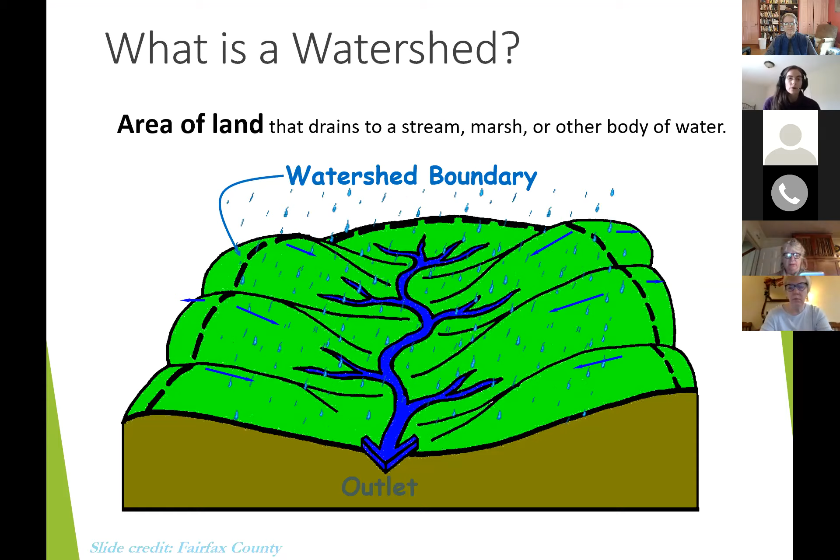We have some slides - again, the definition: an area of land that drains to a stream, marsh, or other body of water. So everyone's got a watershed address.

For example, here where we are, Accotink Creek eventually does drain to the Potomac River. So you can say you're in the Accotink Creek watershed, but you can also say you're within the Potomac River watershed. Then eventually we get to Chesapeake Bay and then the ocean. So these watersheds are sort of nested inside each other - you can say you're as small as a local stream, or even up to within the Atlantic Ocean watershed.

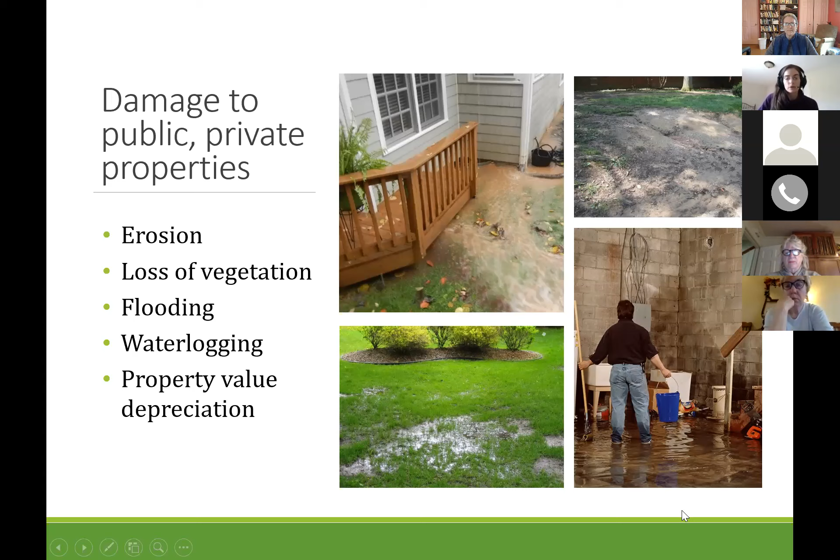Things like ponding water in the yard, but all the way up until actual damage to the home and the foundation and basement flooding. So as I talked about at the start, there are some conventional solutions.

These are more the capture-it-in-a-pipe-and-move-it-away-quickly solutions. Not saying these are wrong—these are the typically used solutions—but now we're trying to think a little bit more about adding in infiltration. Instead of just taking the water off our property and pushing it to somebody else to deal with, let's try to be responsible stewards and capture our stormwater as best we can, reuse it, or let it soak into our properties.

Common solutions you might see around homes or communities that are conventional solutions are just downspout extensions—burying, connecting it to a corrugated pipe, burying it, moving that water away from the foundation, which is always a great idea. You don't really want that water discharging within about 10 feet, especially if you have an underground foundation. It can be closer if you don't have any subgrade structures like basements. Generally, the rule of thumb is about 10 feet from the basement is a safe place to discharge stormwater.

French drains are another commonly used solution. I've heard French drain used as a term, sort of a catch-all when stormwater contractors are talking about them. Sometimes the downspout extension, which is just taking a solid pipe and moving the water away, is also talked about as a French drain. It can be hard—you can ask clarifying questions to really try to understand what your contractor is talking about when they say a French drain. There are many different solutions that go into it, so try to understand the actual solution being proposed.

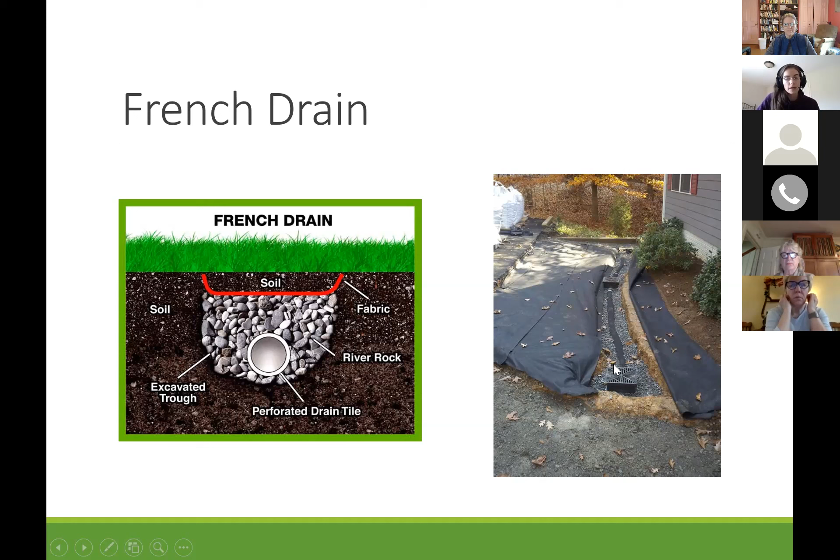But the French drains move the water. They're trying to drain the surrounding soils, soak it into the pipe, and move it away again for any low-lying wet spots. These solutions are typically used that way.

Catch basins I just referred to can be part of that French drain system, or they can be installed at those low-lying wet spots on their own. Frequently the catch basins, instead of being connected to a perforated pipe with holes trying to drain the surrounding area, can just be attached to a solid pipe that diverts that water away someplace else.

Another conventional solution commonly used is a dry creek bed. Again, we've got a downspout here. Sometimes these solutions are great ways to try and move water off of hill slopes. So a lot of what we're going to do is try to see if there are ways we can divert runoff off of hill slopes, because they can be very erosive on hill slopes.

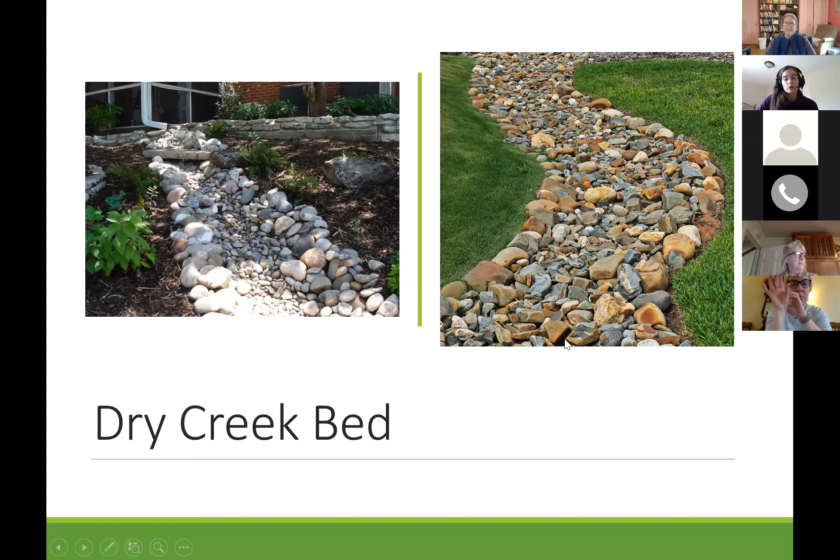So this was probably cutting into the soil. By hardening this channel, you can safely divert it to another place. Maybe there's an opportunity at the bottom of this hill to then infiltrate that water, which is the next step we'd like to see. But as a conventional solution, dry creek beds are just a more visual way to do it—instead you could have buried a pipe through here connected to this downspout. They can also be larger, capturing water moving across a landscape.

Some examples of conventional solutions: this is the installation of some retaining wall and also a French drain system going in.

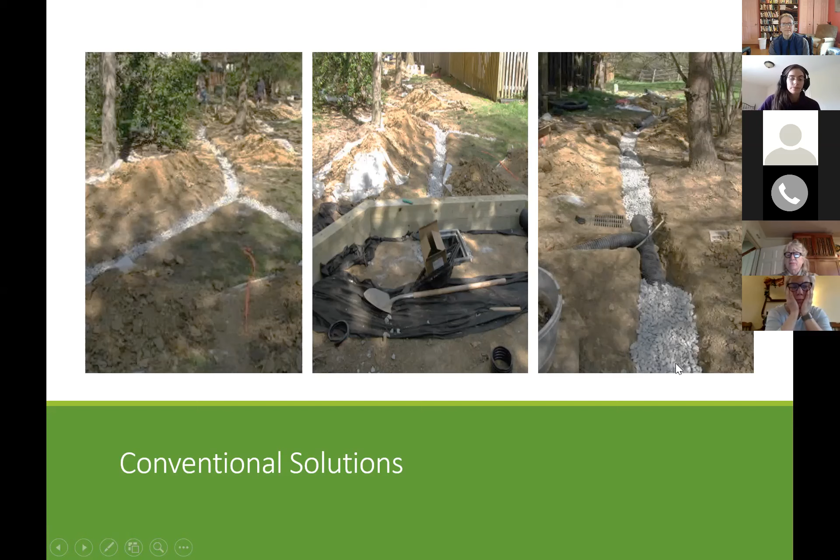So conventional solutions, what do they do? We just talked about them—they capture and they concentrate that flow. Sometimes they cannot be effective in dealing with a whole bunch of water, and you might have a lot of maintenance. I'll say for all of our stormwater solutions, you will have ongoing maintenance you need to keep an eye on, but some of these conventional solutions like French drains might be more maintenance intensive.

French drain systems generally, when I've heard people have installed them, sometimes fail in as little as two years; some people say they last as long as ten years. That's because of those perforated pipes, with gravel around them to try to prevent soil from silting in. But because of all the small slits in the holes, they do tend to clog over time, so digging out and replacing that system becomes necessary since it has a lifespan associated with it.

Outfall limitations—so you're putting this water into a pipe. Well, where are you sending it? Where are you directing it? Where is that water eventually going to go? You need to think about that. Quality and quantity benefits we'll talk about when we discuss the different types of green or low impact design solutions.

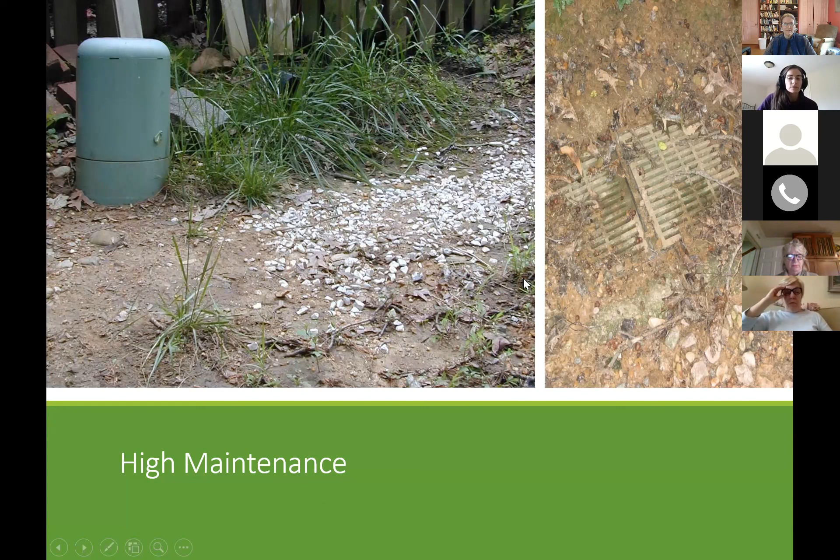Some slides just show some of those issues I saw. Frequently those catch basin boxes can get clogged with sediments if the surrounding area isn't stabilized, if there isn't good turf cover, or if they're used in shady areas or areas with lots of mulch. All of that can still wash into those boxes, clogging up the boxes themselves and even the drains.

So the conventional solutions we just discussed versus these best management practices—I call them low impact design or the more green type of solutions. Our stormwater best management practices we'll talk about; you might have heard of rain gardens as a term—that's one type of solution. They really offer an opportunity to capture that stormwater, reducing the overall volume of stormwater going to somebody else. With the conventional approach, we put it into a pipe, and that pipe is going somewhere, impacting somebody else in some way.

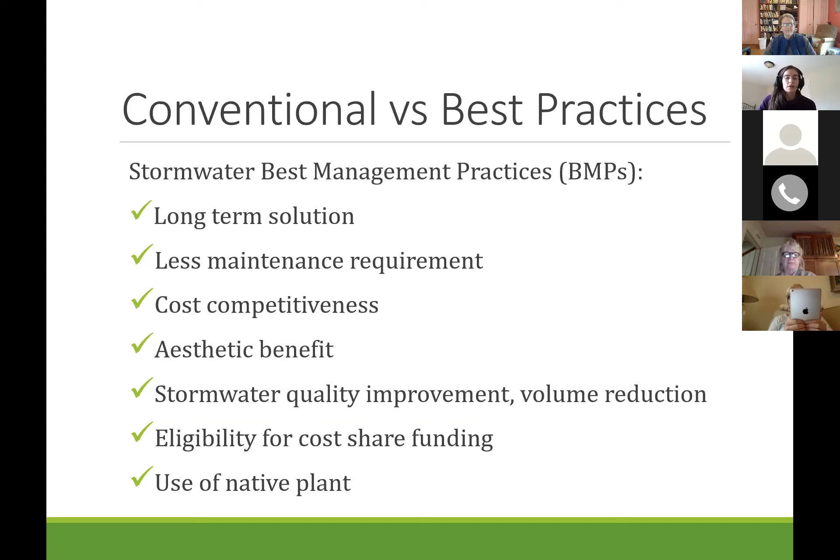Best management practices try to take our stormwater, use it on site, and give it a chance to infiltrate into the ground. One type homeowners hear a lot about is rain gardens. There's other things such as rain barrels, cisterns, permeable pavers, conservation landscaping using native plants, vegetated swales, and infiltration trenches or dry wells.

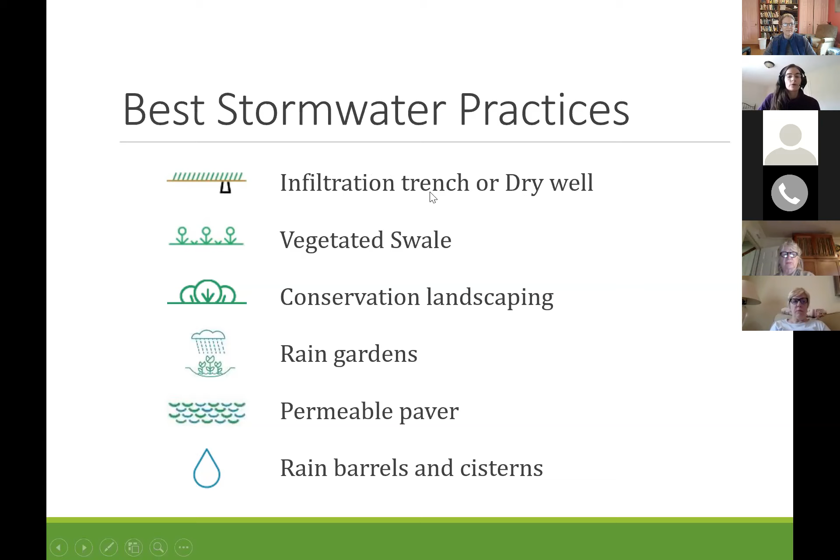Those are two words that sort of mean the same thing. Generally, homeowners, we talk about dry wells as a smaller scale system for a single home on a lot. An infiltration trench is a scaled up version of that practice, just a larger size facility meant to take more stormwater, more downspouts, more runoff.

So we're going to breeze through a couple of these to try and describe some of them. Some of them I've left off, but you can check out the other webinars. In the interest of time, we'll move through these, describe them, talk about when you might use them in a landscape and how they serve you.

There are some do-it-yourself kits you might see at your local hardware store that look like a trash can system. It's empty in the middle, so that gives more void space, so you can take more stormwater if you have a hole that's empty as opposed to a gravel system.

There are many different systems, but these are basically just big holes in the ground that we dig to a certain depth where we can get better draining soils. For the most part, our soil scientists in our area know that when you go out in your yard to try and plant a plant, you've got that Virginia clay everybody talks about. These systems try to get a little deeper than just shallow on the surface, about 2 to 3 feet down.

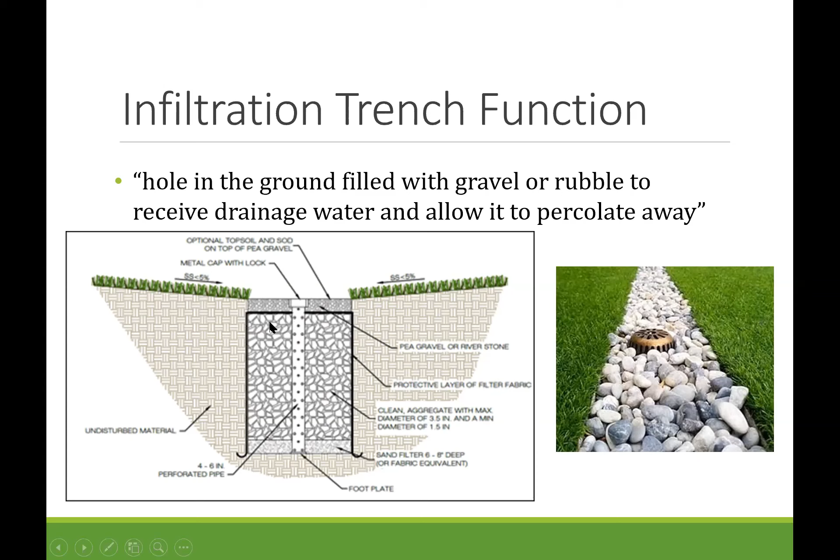So infiltration trenches are doing that same thing, holes in the ground with the gravel just to hold structure. A lot of times there are downspouts tied underground straight into these systems. These can be designed so you might not even see them or know they're there. Some of them can be turfed over.

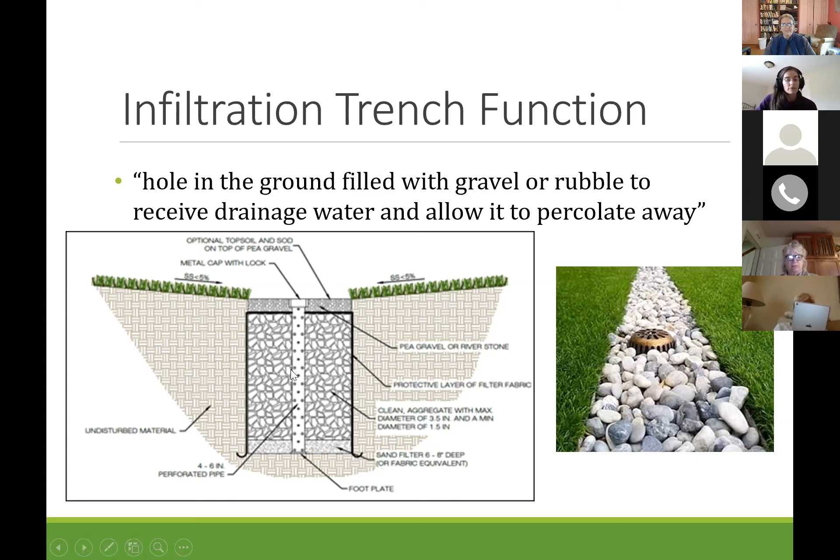This is an observation well. It's good to have some way to keep an eye on them, so you can monitor over time how well they're draining down after a storm. You can check the water level in there.

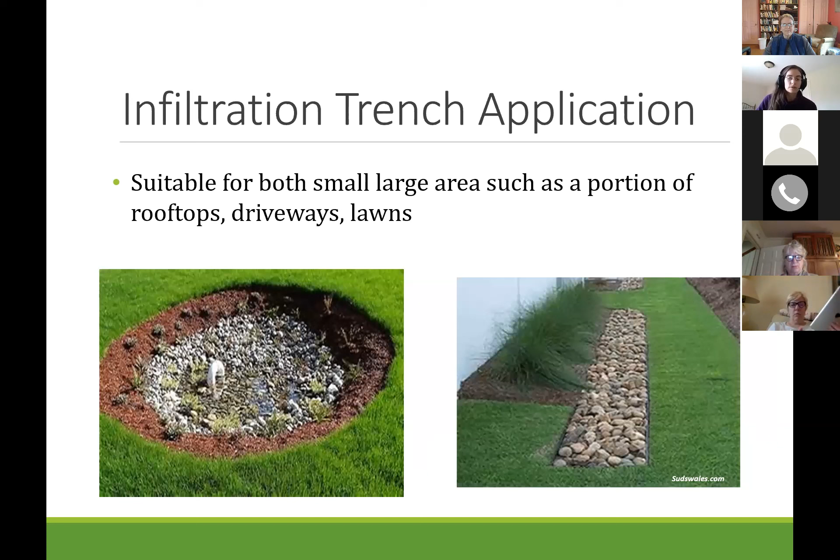So infiltration trenches, like I said, dry wells are sort of a smaller term for the same thing. They can take small amounts of runoff from hard surfaces, like your rooftop, your driveways, and your lawns. Some of these can also be sized up to really take a large volume. Of course, the costs increase as you get larger with these things, but here's an example of just how large they really can be.

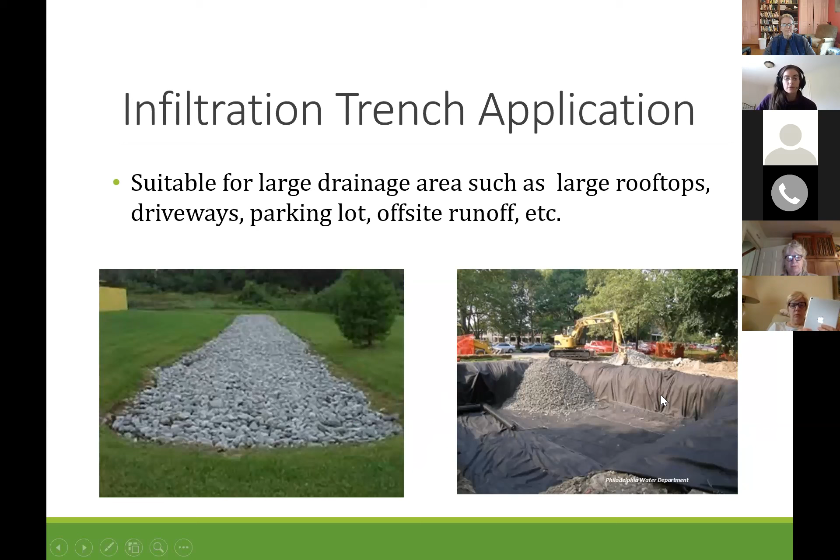Really very large, taking area from very large commercial settings, maybe parking lot runoff and other things like that. This is an example of an installation of an infiltration trench that went in. So sort of the end product here, you can see digging down to create that. Some downspouts were routed in here. That's the observation well I talked about, to keep an eye on how things are going and draining down. But this was just turfed over.

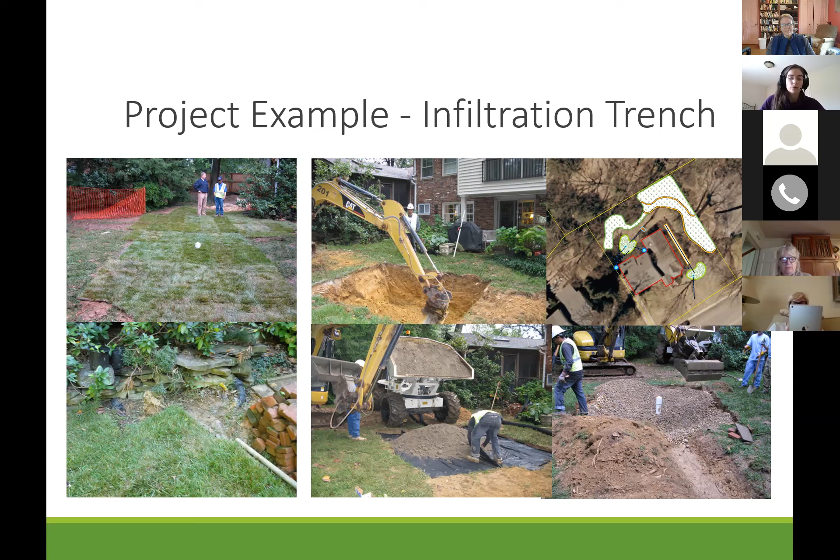So you might not even know it's there in the landscape, doing a lot of good for you. Some of these stormwater solutions can really be blended into the landscape well, while others can be more visual features, like rain gardens. This infiltration trench example used some catch basins to try and drain some low areas, and it also had the roof downspouts routed into it.

What are the benefits from installing an infiltration trench? They work for both small and large drainage areas, so that's how much runoff they can handle. Some of them can handle large parking lot areas, so they can really handle a lot of water.

So we get quality benefits and runoff reduction benefits from these solutions.

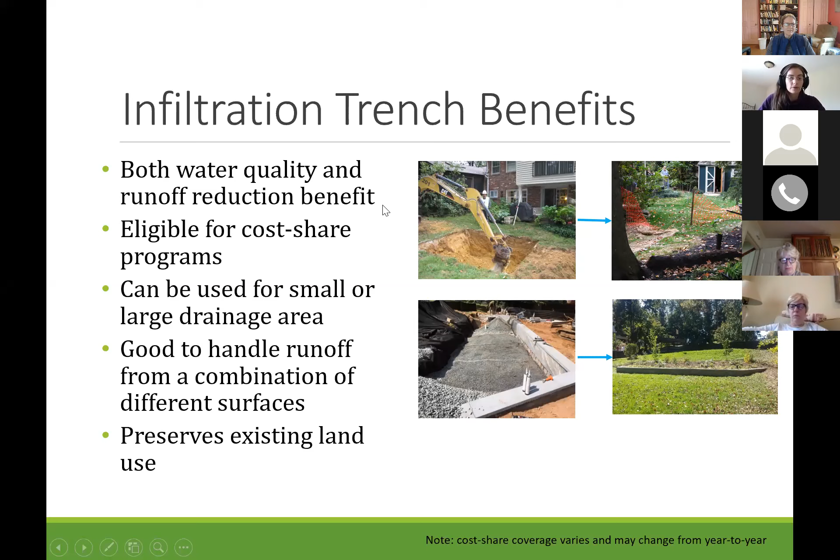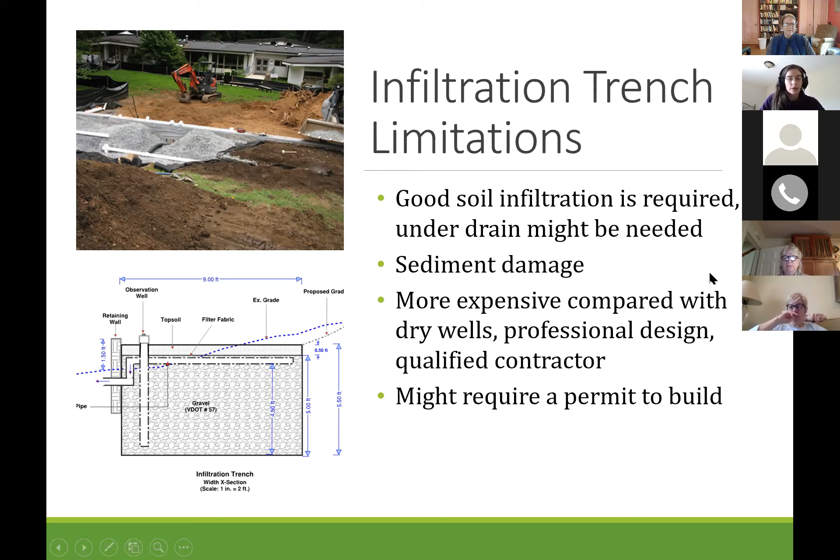Limitations: as with any of these stormwater practices, you really need to have suitable soils for infiltration. Most of us are familiar with digging and finding heavy clays in the top layer, but these systems dig down deep. This one went down 5 feet, so pretty deep systems where we're going to get freer draining soils.

At local hardware stores, you might have these dry well, pre-made solutions. These are those chambers I was talking about. They're completely empty, so you can actually hold more stormwater than if you just had a whole gravel-filled area.

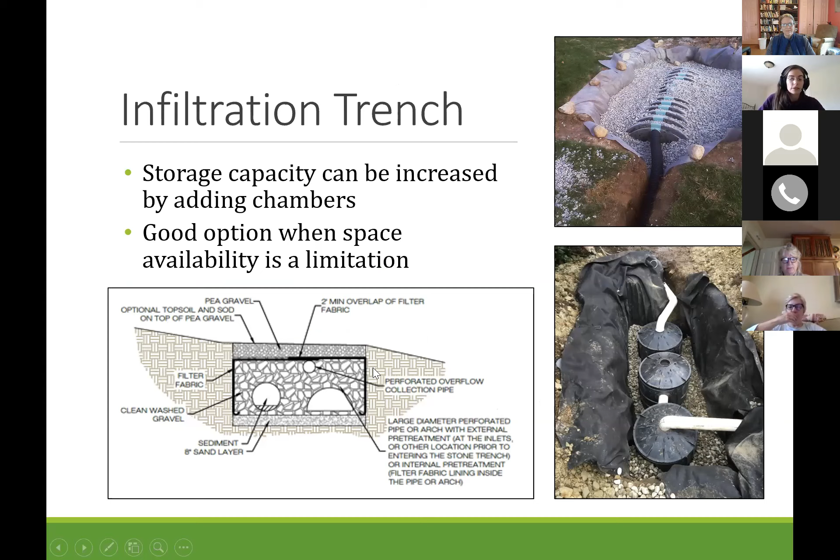Next we're going to discuss vegetated swales. One of the homeowner associations that I received pictures from actually was referring to issues with swales, and we'll get to those photos later.

Generally, swales are channels built to convey runoff. You want them to be well stabilized, so you do want vegetation there, or if it's too steep you might have to use rock material, because vegetation might not be able to handle the steep slope and slow that water down adequately.

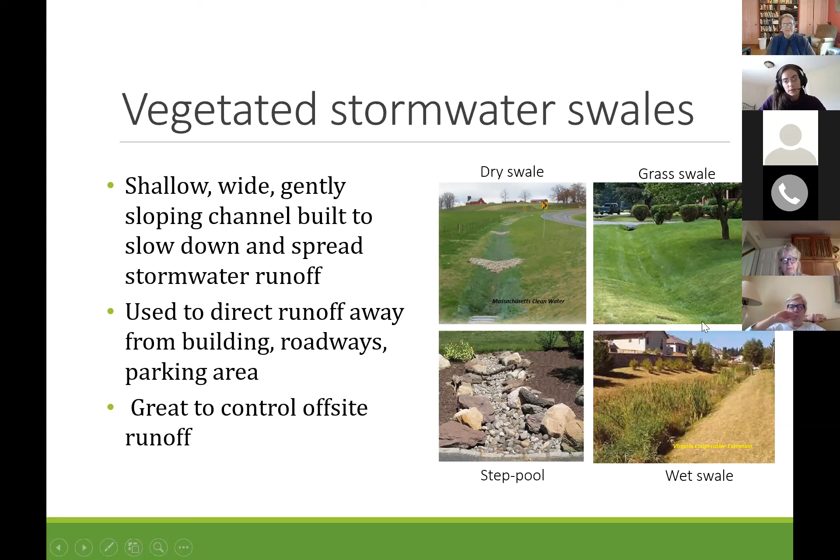This is a bigger example of those previous slides.

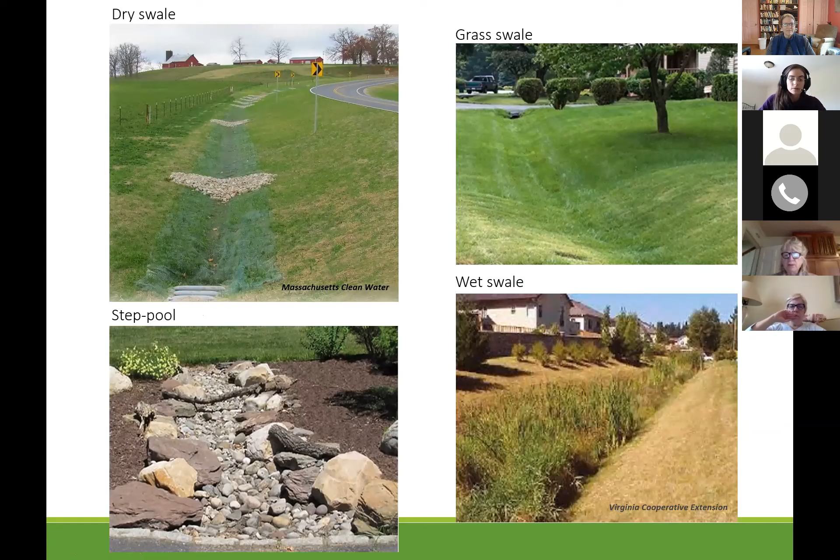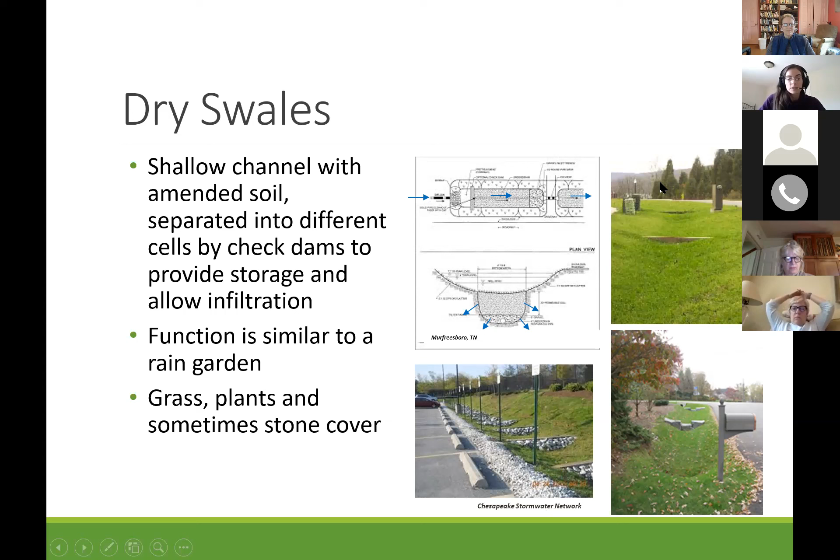Dry swales again use those little check dams or rock structures to slow the water down and give it a chance to filter in. These dry swales, even though they look like they're just turfed, actually have amended soil underneath. We need well-draining soils underneath for these to work, but we can add well-draining soil and these little check dams to allow water to soak into the ground rather than just speeding on through.

Here are some pictures of really gorgeous vegetated swales. Overall we're trying to decrease the amount of runoff, so doing some volume reduction, some capture and infiltration.

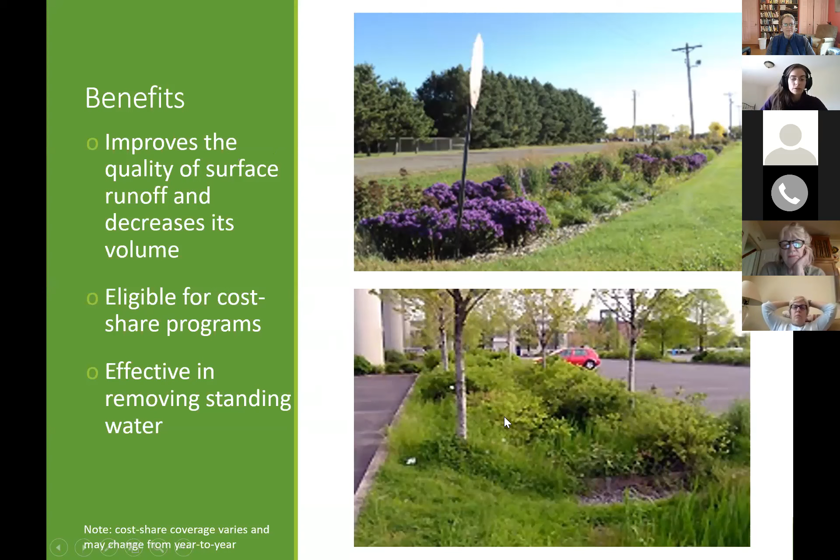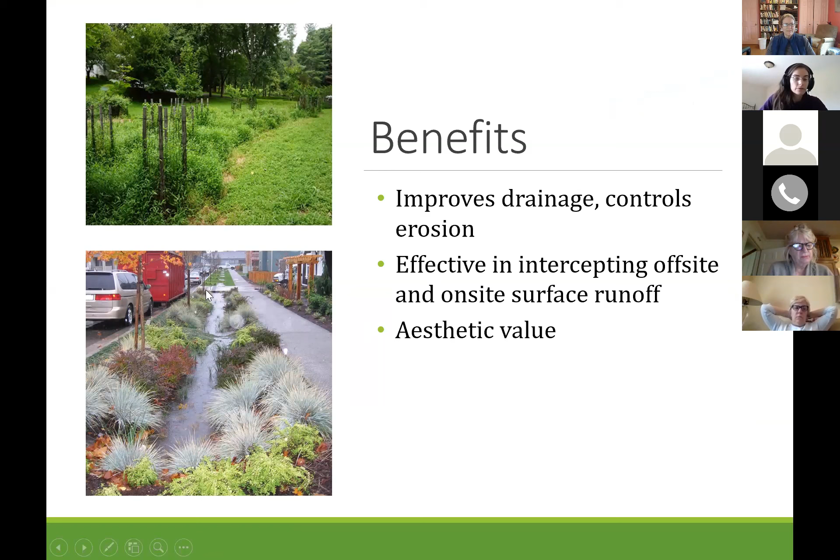Limitations to these practices: you really can't just plug them in anywhere. Infiltration trenches need a relatively flat area and well-draining soils for you to stick a dry well or infiltration trench. Swales really need to be pretty large solutions with gradual slopes to have the capability to slow down and spread their water out - not recommended on a steep slope.

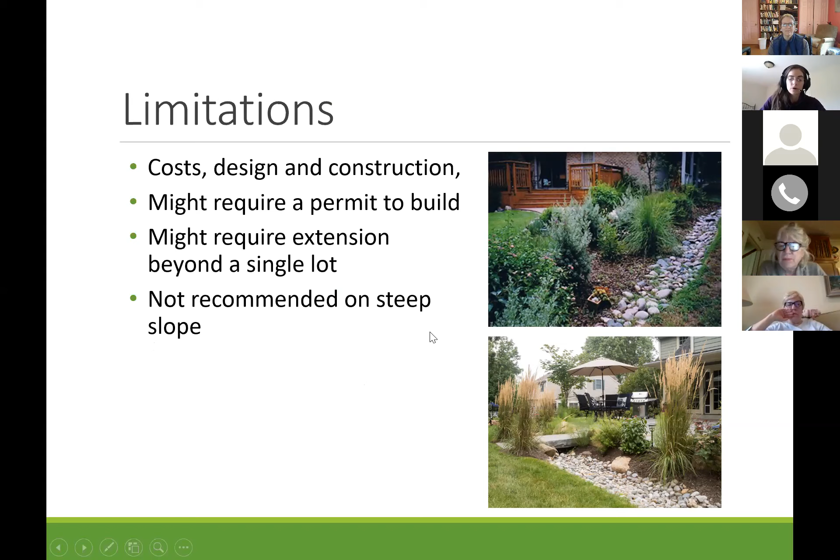What happens when you have a really steep slope and need to use rock material? Before we showed that dry creek bed solution as a conventional solution - this step pool is a very different solution. We talked about amended soils under that dry swale; the same thing applies here with the step pool. We're really getting in and replacing some of this material.

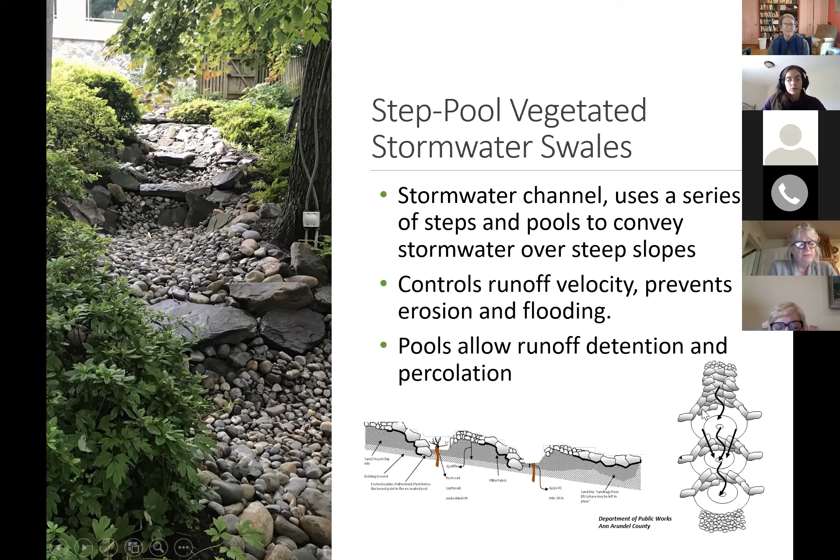We're trying to have these steps, these check dams with ponding areas, so as water flows through it's not shooting quickly down - it actually has a chance to stop and soak into the ground as it moves through. With a steep slope, you really might need a rock-reinforced channel if it's a shorter, steeper area, because vegetation just won't hold up to the velocity or flow moving through there.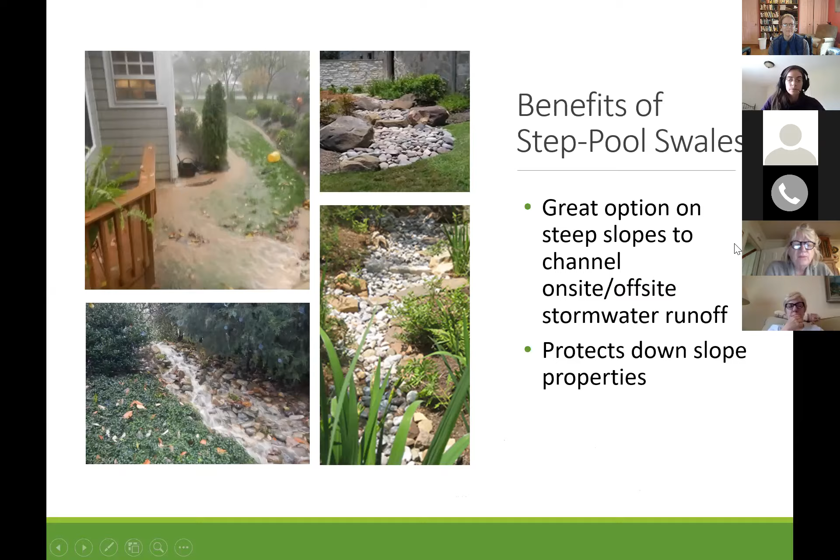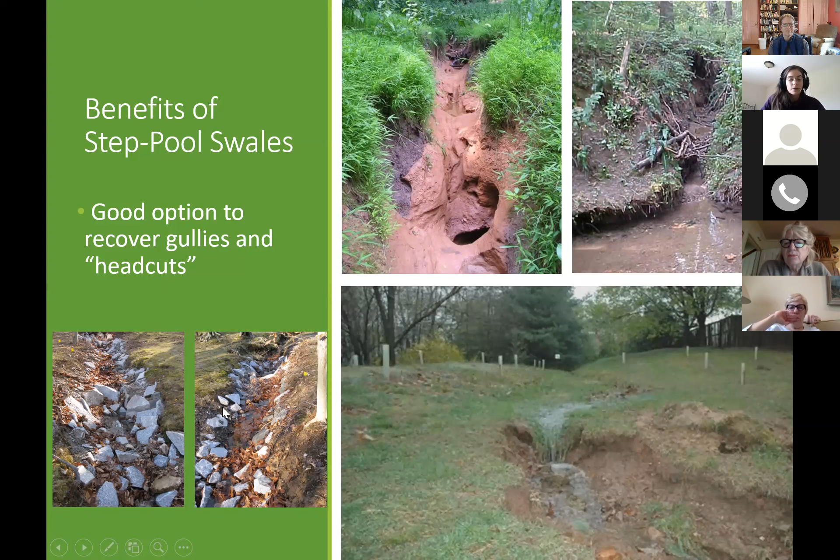Much of this is the same as what we talked about with the dry swale. Step pools can really be used to recover from pretty drastic situations, like gullies or headcuts that might be occurring in the landscape - these systems might be able to be installed there.

Limitations - these can be pretty expensive design solutions, with lots of earth moving and rock material and grading involved.

Downslope connection - just think about how water is still moving through this. We're trying to capture some, but eventually it's going to discharge and end somewhere, so think about where you're sending this water. If you get a large storm, you'll have a lot more moving through than your system can handle, so where is that going? Make sure it's properly stabilized to handle the amount of flow moving through it.

Conservation landscaping - one thing we talked about is using local native plants, replacing turf grass or other invasive areas in the landscape, maybe even areas of bare soil, and trying to incorporate native plants.

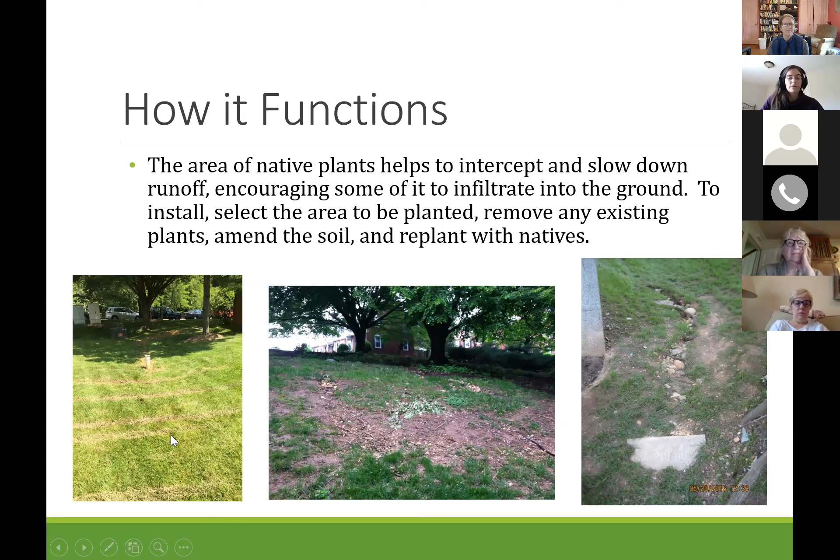Conservation landscaping - again, using native plants, we're trying to improve the infiltration of the ground with deeper rooted vegetation than turf. Hopefully if there's stormwater moving through, more of what falls is going to soak into the ground rather than running off the turf. A lot of water on turf, especially with slope, is going to be conveyed across the landscape rather than soaking in. We're hoping the native plants give an opportunity for that water to soak in.

For homeowners, it's a pretty easy do-it-yourself project - conservation landscaping, removing invasives or turf grass, and just adding in some native plants.

In heavy shade areas, grasses or conventional lawn grasses don't do well. If we only have about 3 to 4 hours of sunshine in a spot, our grasses really aren't going to hold up and do well.

Plant Nova Natives has lots of templates and different designs and plant lists, so you can use some of those solutions, design it yourself, or have a landscape designer help install those.

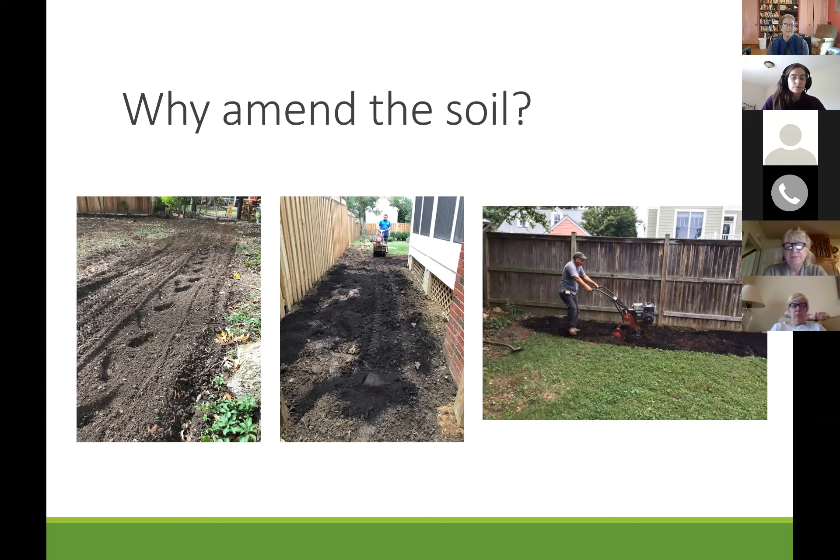We recommend installing those landscapes by amending the soil, trying to break up some of the compaction, and including a compost material amendment, again just to increase the water holding capacity of the soils at that upper level, letting plant roots establish and really spread through that area.

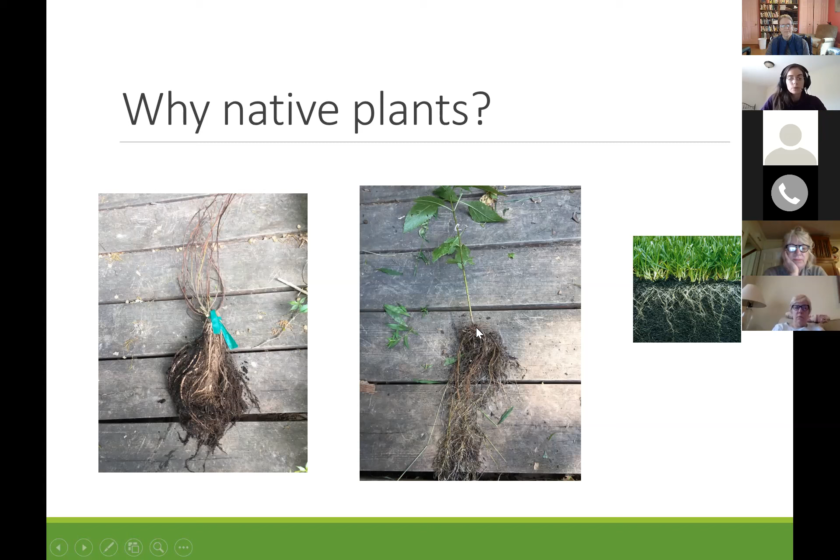Why do we like native plants? I talked about this a little bit - our turf grasses are relatively shallow rooted, while our native plants and other vegetation have these extensive underground root systems, which helps soak up that water, colonize the area, and break up the compaction.

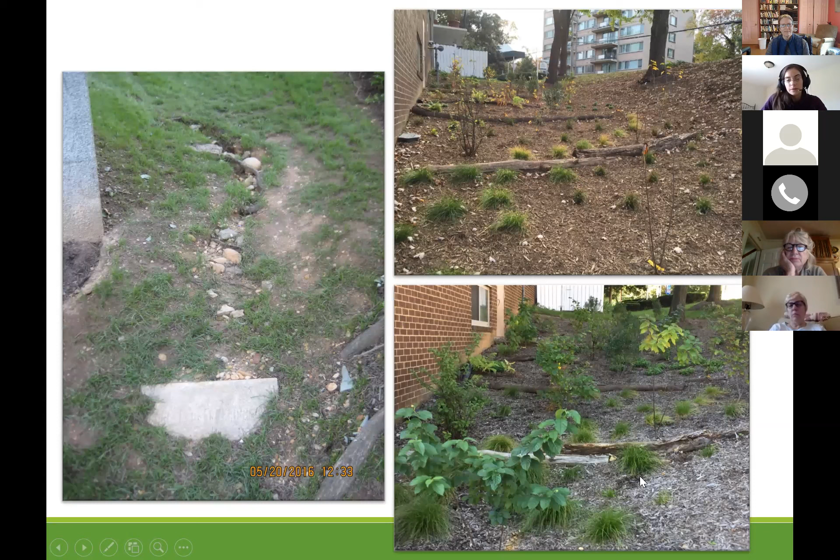This is an example of a hill slope that was informally terraced using fallen logs in the area, with extensive amounts of mulch, removing the turf, and putting in some native grasses and other shrubs growing here.

Another example of this hill slope, and this looks like a whole bunch of golden groundsel that was planted here.

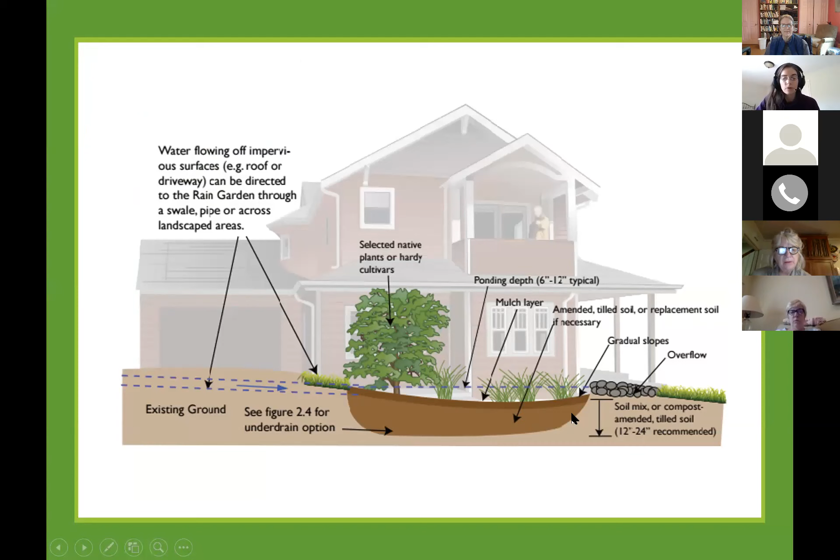Here's a good example from the side to see what's going on underground. Again, the amended soil, or it might need to be replacement soil in those bowl-shaped depressions.

Inflows and outflows are areas to think about that might need to be more highly stabilized with rock material, because that's where the concentrated flow is coming into those systems, typically through pipes from downspouts. We want to give that water a chance to slow down and settle before it enters these areas, so we don't have scour.

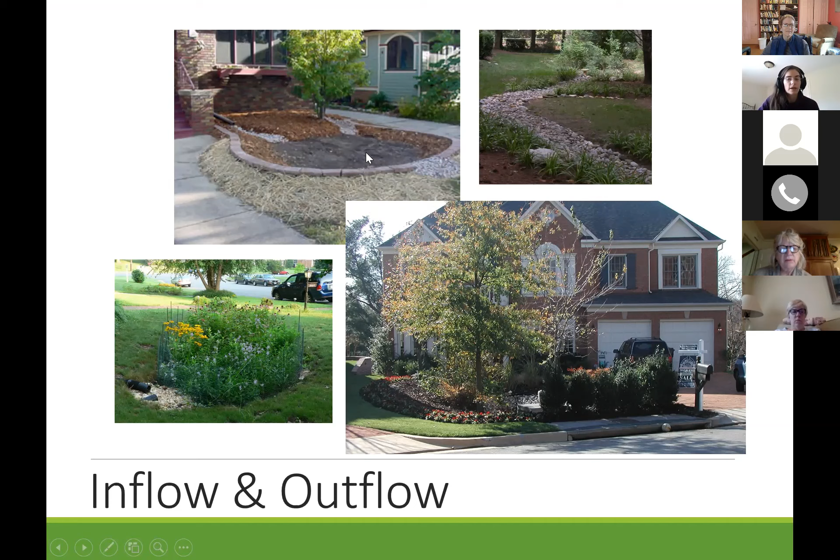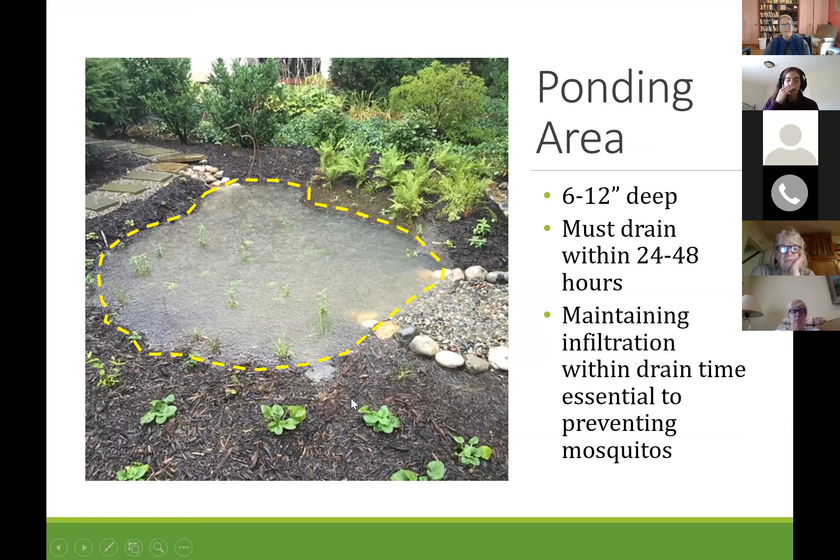The ponding area is that depression, that bowl-shaped area we talked about. It could be as little as 6 inches, or a foot deep, with this sloped area. We really want these areas to drain well within 24 to 48 hours, so we're not having standing water issues. If it's not draining within that time, there could be something wrong with your rain garden.

Here's an example of when the soil was just amended, instead of removing and replacing the native soil, by adding lots of free draining compost.

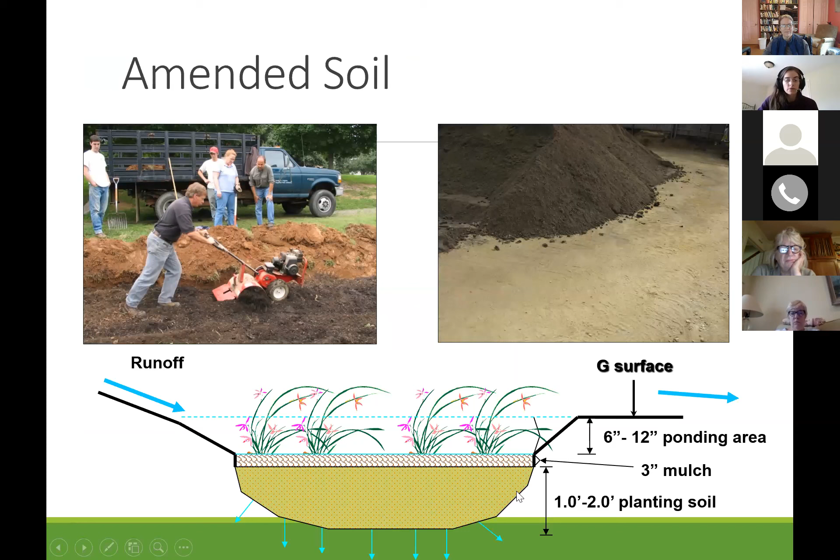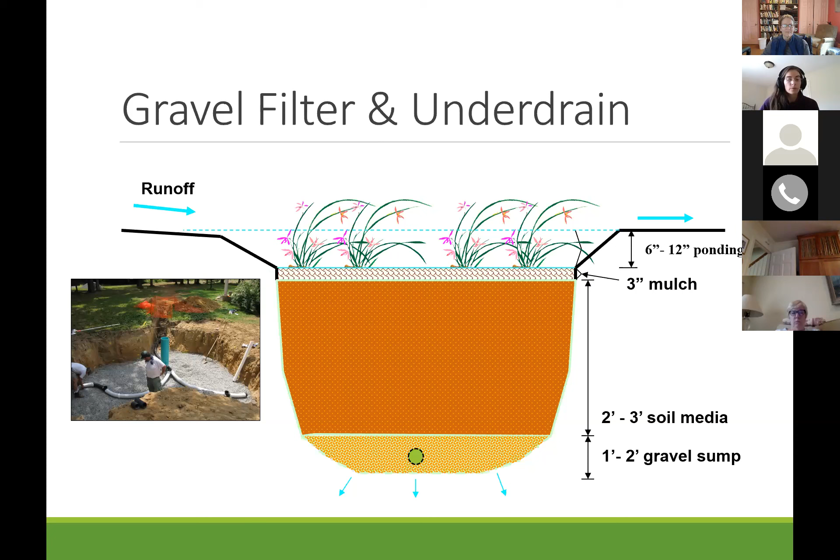I'm not going to discuss the under drain system. Those are for more intensive, large scale solutions. Typically for a homeowner scale, under drains aren't needed, depending on the amount of volume you send into these systems. If you're sending a lot more runoff and volume, including an under drain is a good step.

Here's a common misconception we see, especially when we do our rain garden presentations. People see these low-lying wet areas in their landscape and think, water's already ponding there, it's already almost its own rain garden, so let's put a rain garden there.

What we're seeing with this low-lying wet spot is the soils really might not be free draining. Again, with rain gardens, we want the water to soak through, not sit and pond. So if you've got this low-lying wet area, you might need extensive soil mitigation, but it really just might not be a suitable spot for a rain garden. That's a common misconception we see.

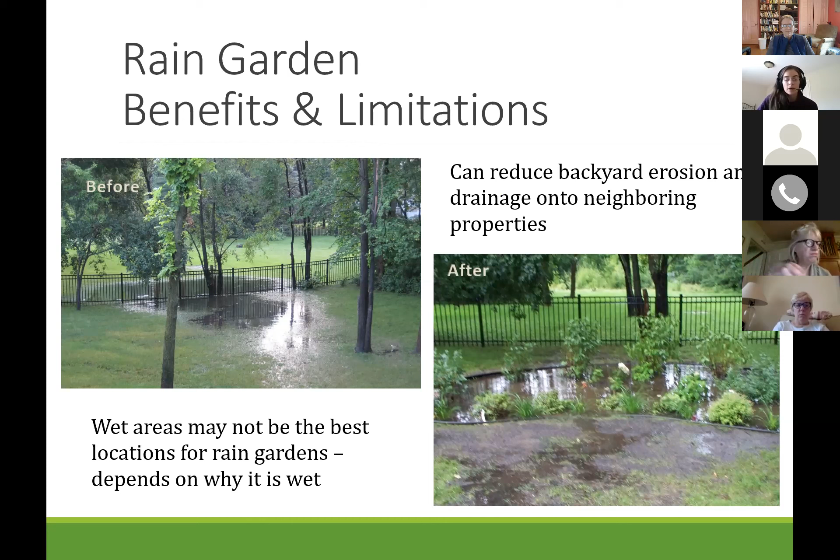These lower lying wet areas, people think it's already kind of a rain garden. What you can do instead is put in appropriate native plants that can tolerate wet feet, landscaping them in to disguise it a little bit. But a rain garden really isn't a great solution there.

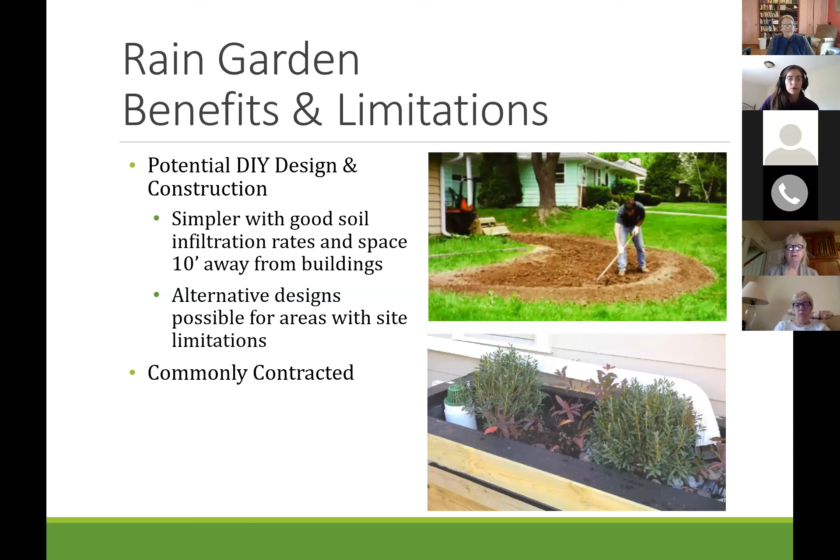We've had homeowners do rain gardens themselves, or have had contractors install them. They can be really beautiful. Again, we're using native plants, supporting native wildlife, and all of those benefits.

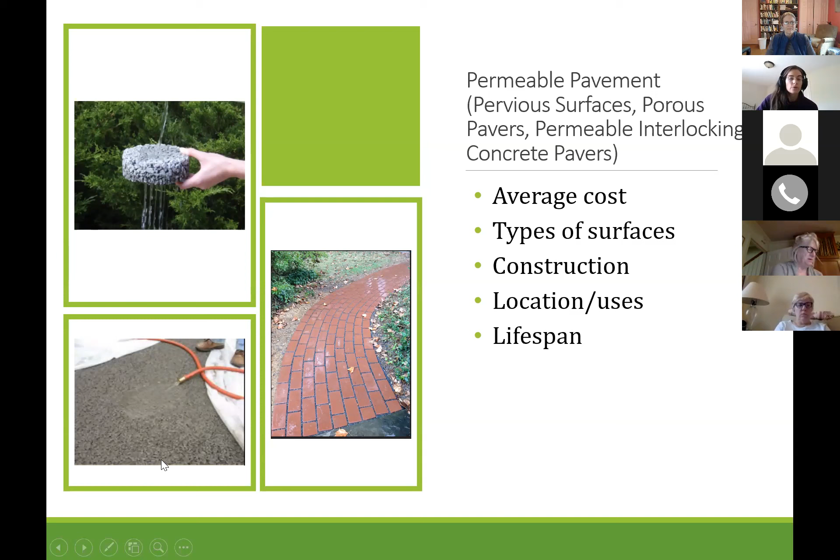Permeable paver systems are different. They can either be permeable interlocking concrete pavers, or a cement or asphalt solution that's free draining. Basically, these work by letting the water through the joints between the pavers.

Typically, we have permeable pavers installed in our area, so those are the ones we've got pictures of, with a bunch of rock material, excavated down. Similar to the infiltration trench, you've got this area where water collects in an underground sump, and then hopefully drains into the soils if we've done our soil test to make sure we have well-draining soils underneath. An under drain might also be part of that solution.

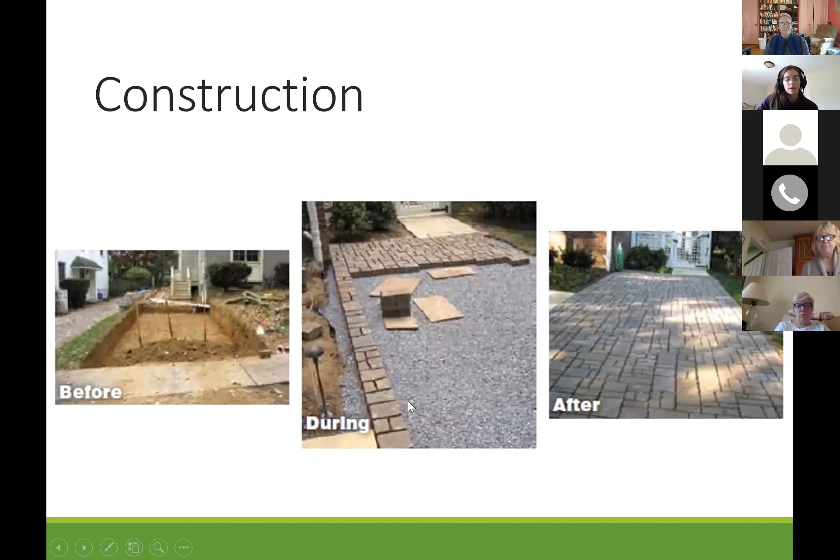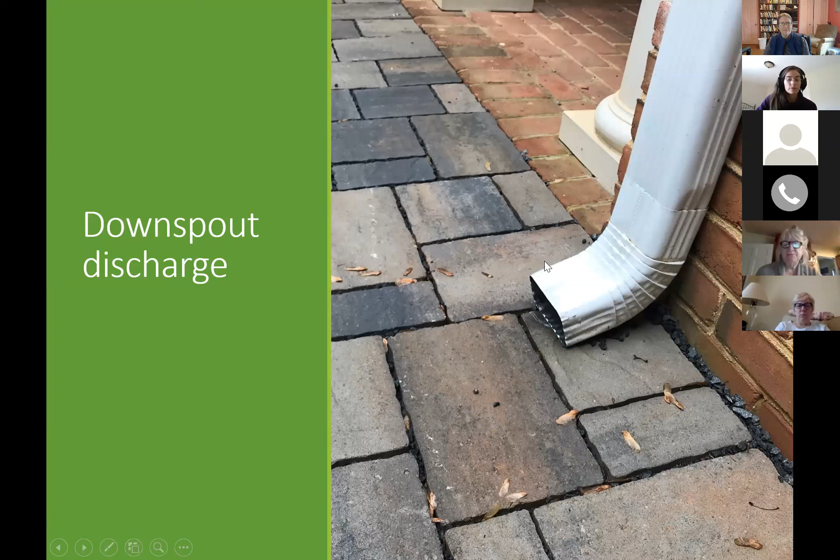Examples of construction. We don't need to discuss edge restraint. You can take downspouts onto these areas and have it discharge, so they can take more water than just what falls on them during precipitation events, if they're designed for that.

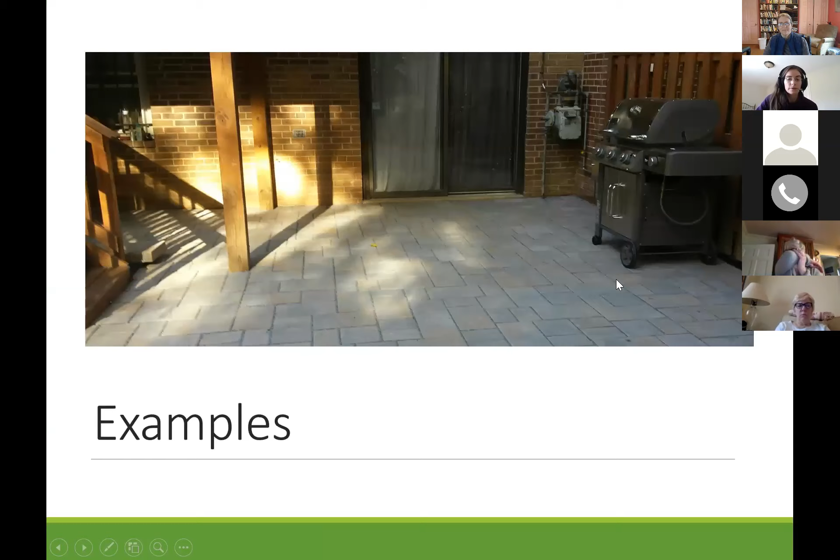Here again is another side view, the observation well, which we talked about before. Just a few examples of different installations. It's a pretty large project.

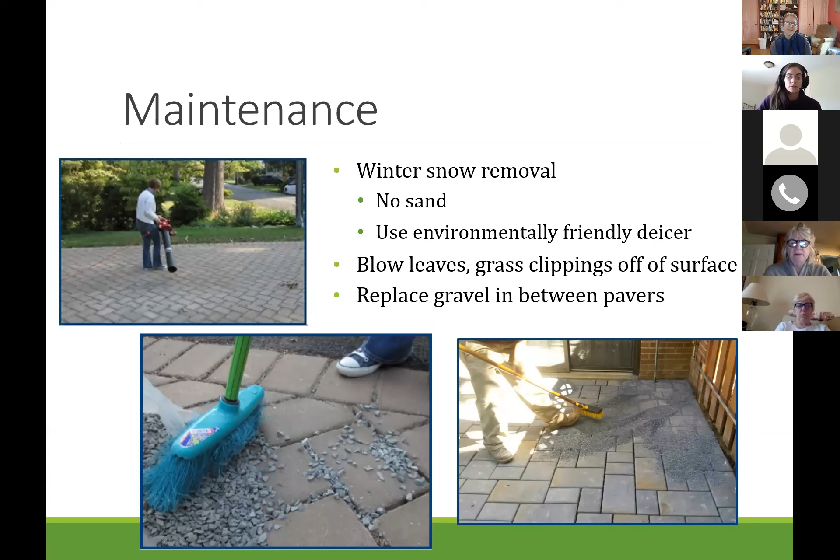There is maintenance, like we talked about with all of these, with the conventional solutions as well as our green solutions - things you need to do to keep these functioning.

Rain barrels and cisterns: rain barrels are smaller sizes, typically about 50 to 55 gallons. You can see a lot of these pre-made solutions that you can buy at home improvement stores. There's also the Northern Virginia Rain Barrel Partnership. I'm not sure how they're doing nowadays with distribution or those build events they typically have, but I'm sure they have more information on their website.

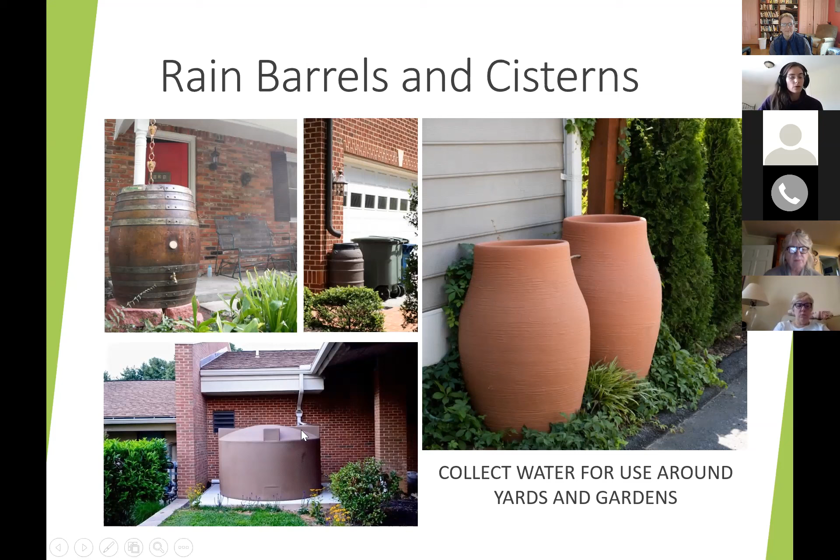Cisterns are really large scale solutions. They can take a whole lot more water than these smaller rain barrels.

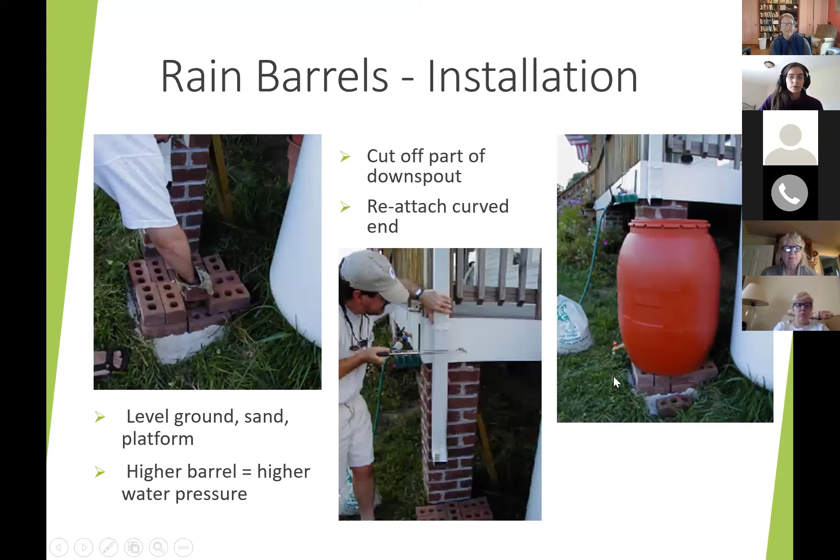What can you do with the water? Generally using them outside your home. So if you're a veggie gardener or have other garden plots, you can reuse that water to water around your landscape if you're establishing things, or vegetables during our hot, droughty summers, bird baths, and other general reuse. A little bit about installation that I'm not going to talk about.

These can be really landscaped beautifully and either stick out or blend into the landscape, however you prefer.

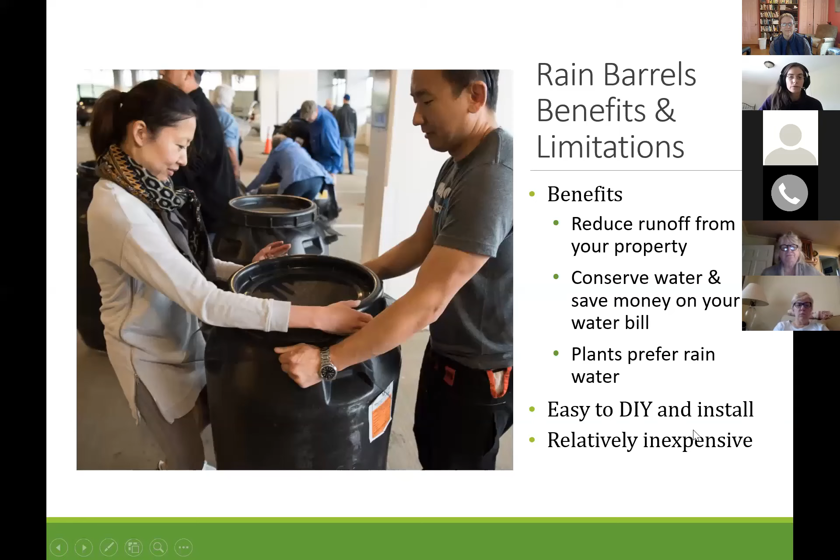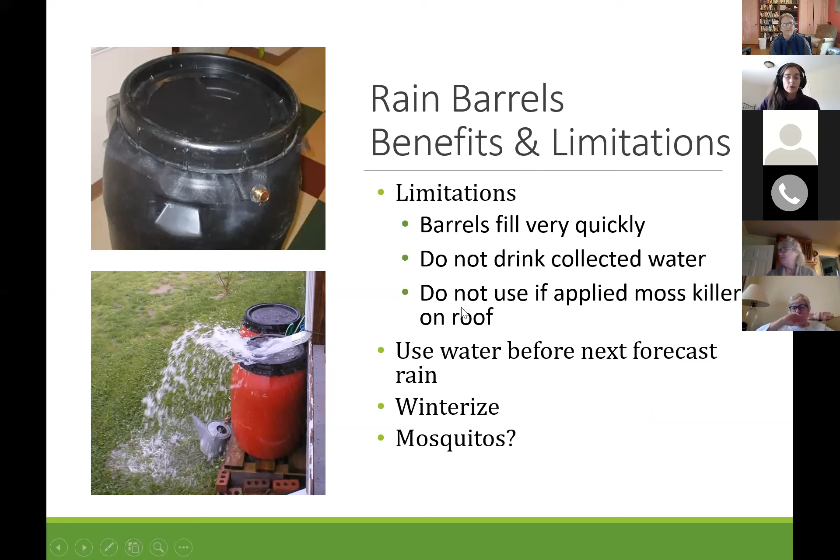We sort of talked about some of those limitations - really the barrels have a limited capacity. So we saw some pictures where people put multiple barrels side by side to daisy chain them, or just get a larger cistern, because they can fill up really quickly in a rainstorm.

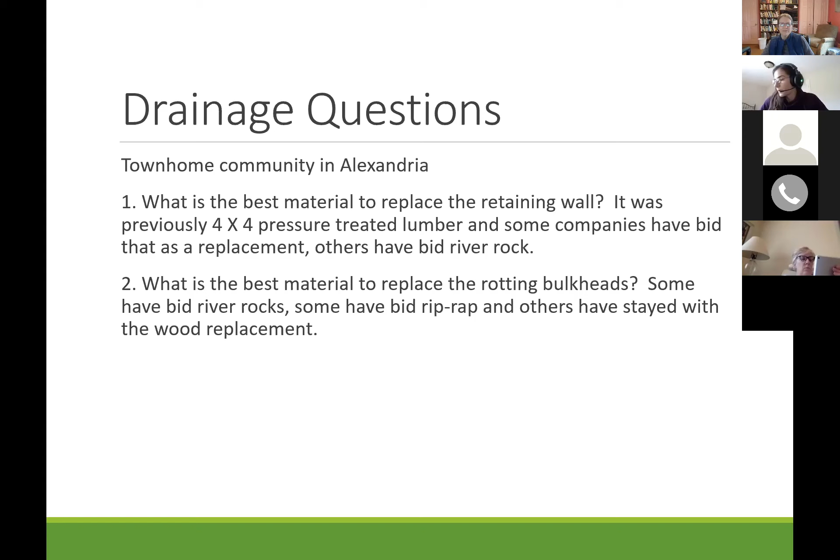If there's any follow-up, we'll put my email in there for follow-up questions. This was a condo association with some steps that we've got pictures of, different proposals for large boulders and/or topsoil and sort of pre-treated timber. So here were two pictures of this area.

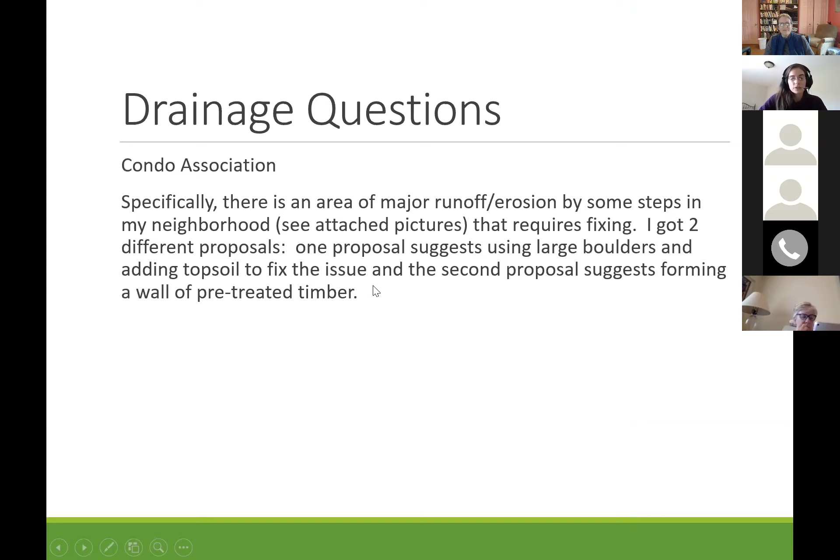For here, I think a little bit of rock material, really not even that great. Sometimes what's hard to tell when you're looking at drainage is whether there's a bus stop or kids waiting for a bus, and sometimes they like to shortcut the stairs and just kind of run up the side and play around. So sometimes it's hard with drainage solutions to really see, did this get eroded because of foot traffic and then water started to follow that channel, or is it really just a drainage channel with no footpath also compacting that area and denuding the landscape? Sometimes those are a little tricky to tease out.

I'm sure there's different costs associated with the retaining wall versus the rock solution. Guessing the rock solution could be the cheaper option, and I think it would be completely appropriate here. I don't really see the need for a retaining wall unless aesthetically there was some other reason why you wanted to do a series of retaining walls and maybe have flat planter bed areas or something. But for this one, I thought just armoring with a little bit of rock.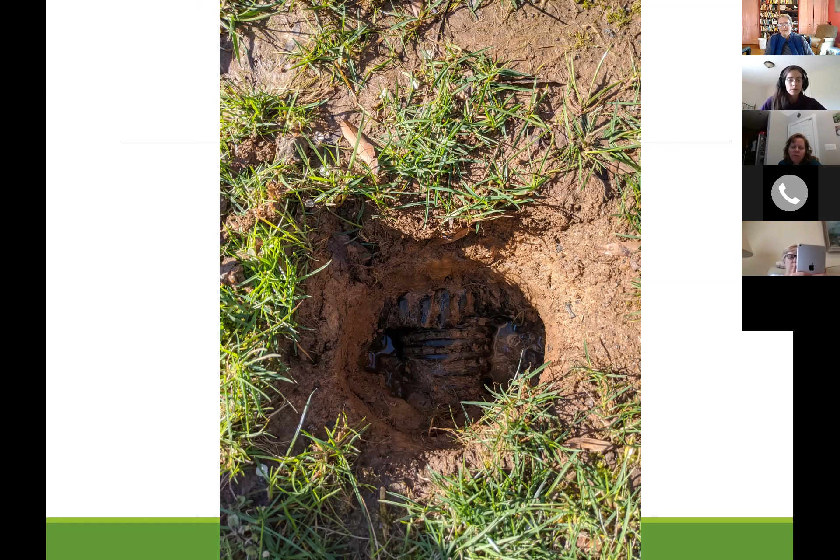This hole is just a few doors down from the pictures next to the stairs. It's kind of the whole area just holds water and then it all runs off, right at the end there.

So are there drainage pipes, downspouts going somewhere, buried? I just want to know where it connects, where it drains out. Again, trying to do that dry weather investigation, if you can take a hose and try to see where those are buried, have somebody scouting around.

Where those solutions aren't really helpful is if there's one of those buried infiltration trenches or dry well solutions. If you run a hose in there, it could take a very long time for that system to fill up before you find where that discharge or outfall is.

Another common solution that landscapers do, if the soils are free draining well enough, is they take these downspouts and just dead end them in the soil. So sometimes it's sort of like a French drain, a modified French drain, but with some infiltration capacity.

So a lot of times contractors just bury these downspouts, connect them to a corrugated black pipe, and then just cap it on the end. And if the soil is well draining enough, for the most part, it can take the water from those storms without having to do that larger dry well solution. So that's another typical solution we've seen within landscapes or with landscapers.

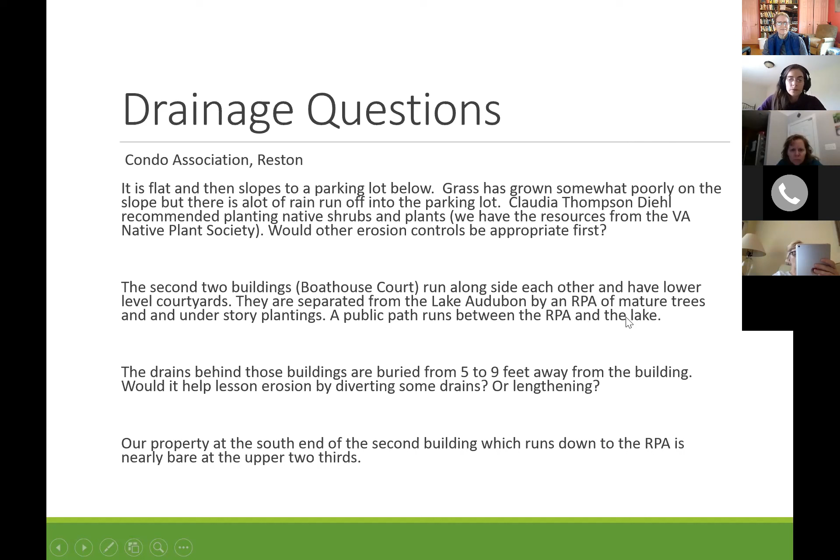I guess there's some drains that are being discharged, lessening erosion by diverting some drains or lengthening. We've got a resource protection area as well because of the lake. So there were some pictures. I don't know if this person is still on, if they can unmute themselves. So I've got a couple of the pictures here. Did you want to try and describe a little bit?

There's really two areas we're looking at. One is located higher up on the property, and that's the first set of buildings.

I think you've already answered our questions about what we have, we really don't need to change the drainage system. We just have an area that kind of flattens out. It really doesn't pool for a rain garden, but it's very sparse, so we need a lot of native plants and shrubs in there. Then after that, it slopes down to a parking lot, and grass really isn't growing well there. So there are underground drains that come out to the parking lot and then go into the Fairfax County drains.

I wasn't sure, I think we're going to have trouble with the homeowners association putting a lot of money into that area where the grass kind of grows there. But anyway, then going across the parking lot, we have a set of buildings.

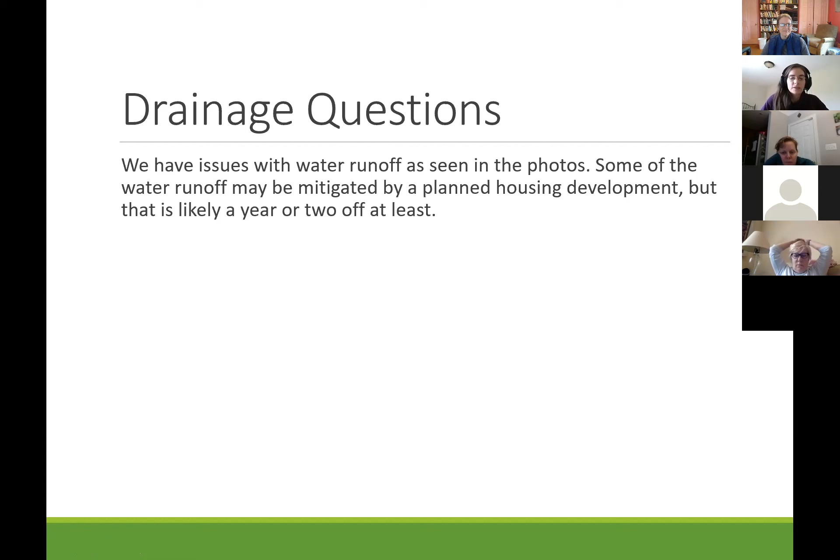This one had a bunch of pictures, and I didn't know if this person was still online, if they recognize this. It was an HOA. I'll parse through the pictures. I believe they had some playground areas, and they also had some runoff areas. If anybody wants to join in the chat box or try to unmute themselves if they're still on the line, let us know if some of these look familiar. This one looks like, I don't know if this is a formal stormwater channel, if this is an outfall here with some rock material. It makes me think it is a stormwater drainage area.

Maria, this is Nick, I'm with the HOA for this property. If you kind of imagine a big square, this drain is on the right-hand front side, right by the sidewalk. I don't think it's so much an outflow as an intake. The creek comes down the hill towards that drain, and there's some erosion issues.

Basically, from this photo, the water comes right in the middle of the photo. You can see the end of the fence. The water comes down along the fence and then cuts across the entire playground, where that tree is at the corner of the playground, on the back side, to this creek. And if it's heavy enough, it'll go past that fence and continue down the left-hand side of the park towards the neighbor. If you see the pine straw on the left-hand edge, that's a photo from their patio, that rain.

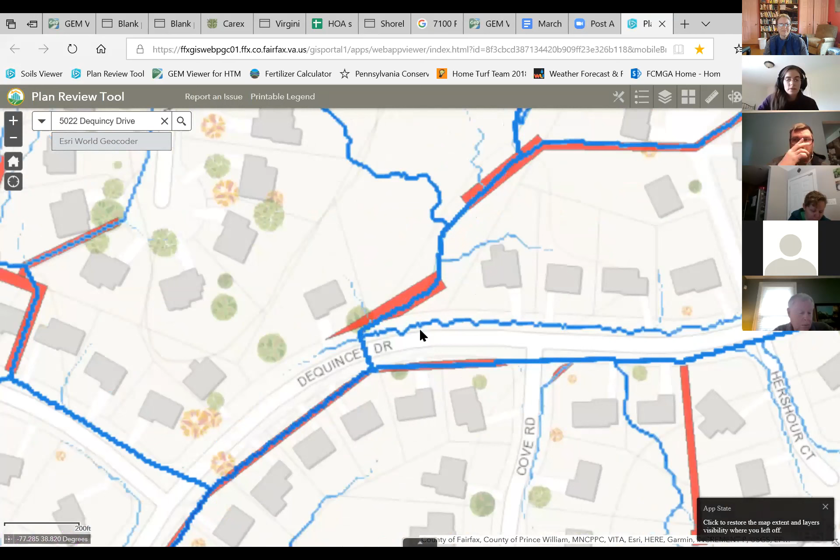Share. All right. Is this map loaded for everybody? Yes, we're seeing it process. Loading? Okay.

I'm not sure how this is, it's pretty slow, so I'm not sure if I'm going to get all the detail on the phone call. I can always follow up with an email and another phone call with you about this if it's not going to load fast enough.

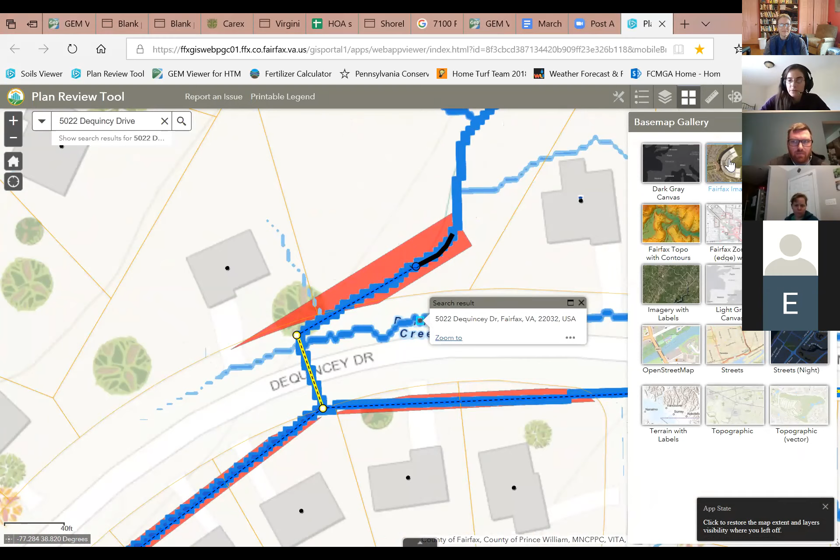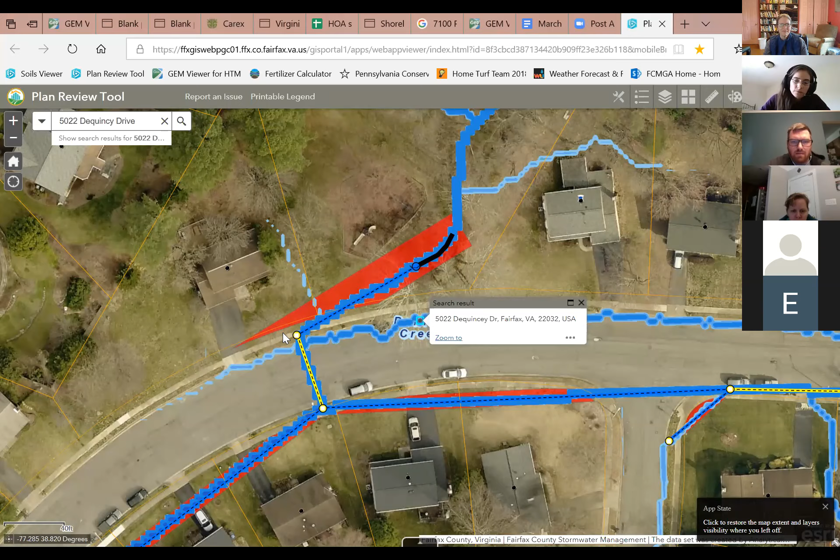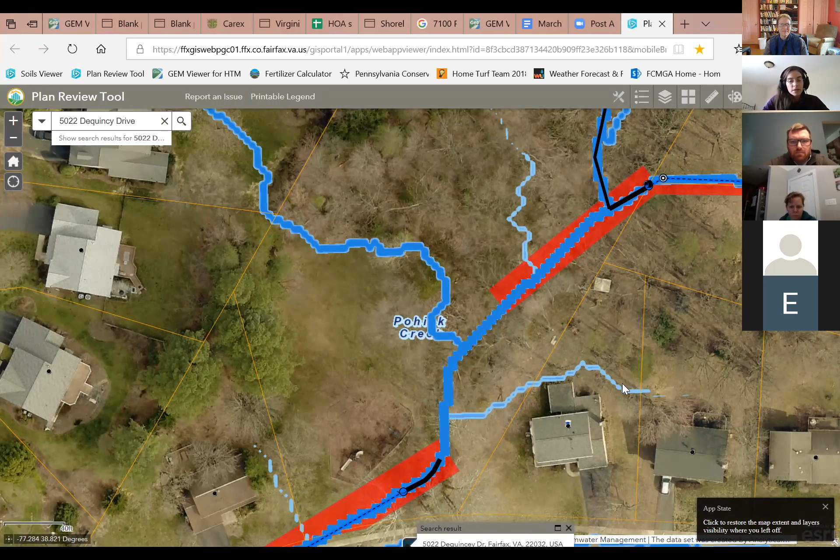But it looks like we've got the playground area here, the drainage you were talking about, then it drains into here. So these blue lines are used to designate overland flow. These are drainage contours that were developed to show overland relief. They look at the contours of the land where things are sloped, and water drains downhill. So some of these are formal stormwater channels taking a whole bunch of water, and others might just be secondary flow paths that, to the naked eye, if you're not out there when it rains, you might not even know the water flow path is there. A lot of times you won't see signs, there's no erosion going on. Everything is just conveying, like for this one, over that turf with no problem, and there's no erosion occurring.

But again, when we get into, is it this flow path that you were talking about? We've got the playground here. Or is it hard to tell? So that solid blue vertical line is probably the creek itself, which I think is a Fairfax County stormwater owned channel. Yes, so this piece, this red part here and this blue, this is showing - I'm not sure why it's disjointed - but there is, like I referred to with that other one, a stormwater easement there. So if there's problems within that channel, I would contact maintenance and stormwater management about that channel or those structures.

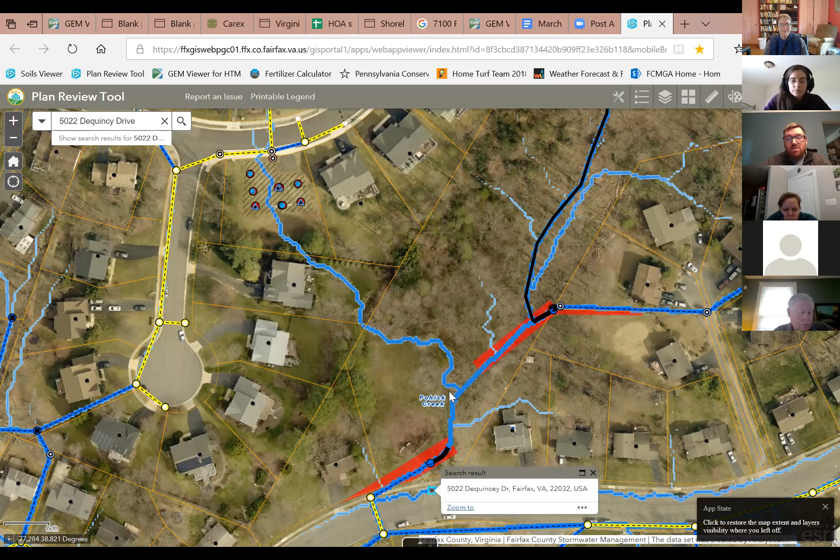I think it's that back one that your mouse is over now that we're kind of having issues with. If it's really heavy, it doesn't follow that curve, it just comes straight down along the left-hand side towards the back of that house in the left-hand corner. And then where it comes across the screen and turns south, there's a big wood pile there that was an old tree that was cut down. And what we've discovered is that instead of going straight back to that stormwater management creek, it's kind of undercut that wood pile, so it's super unstable. It's kind of like a game of Jenga or pick up sticks, where if you put your foot wrong, the whole thing is going to collapse.

So it's a whole other issue that we have to deal with, but that's kind of where the water is going. Our original intention was to hopefully develop some of that area into a natural playground and expand the use of this area. But until we figure out the water issue and where the water is going, and we're able to either mitigate it or manage it...

Yes, so I would encourage, like we talked about, developing areas. Sorry Nick, your connection apparently isn't very good, so some of what's coming out is garbled. Yeah, sorry if we're losing a little bit.

So a little of that homework we talked about: understanding the flow path, watching it during a storm for quantity, understanding if there's - I'm not sure if I have the RPA. I do have RPA on. Okay, so there's no resource protection area in here.

Again, before you undertake any of these practices for any of these HOAs, talking to the engineer of the day for Fairfax County - they're a great resource to see if whatever permits or things might be needed or necessary. Anytime that you're disturbing over 2,500 square feet of land surface, there is a land disturbance permit that is required.

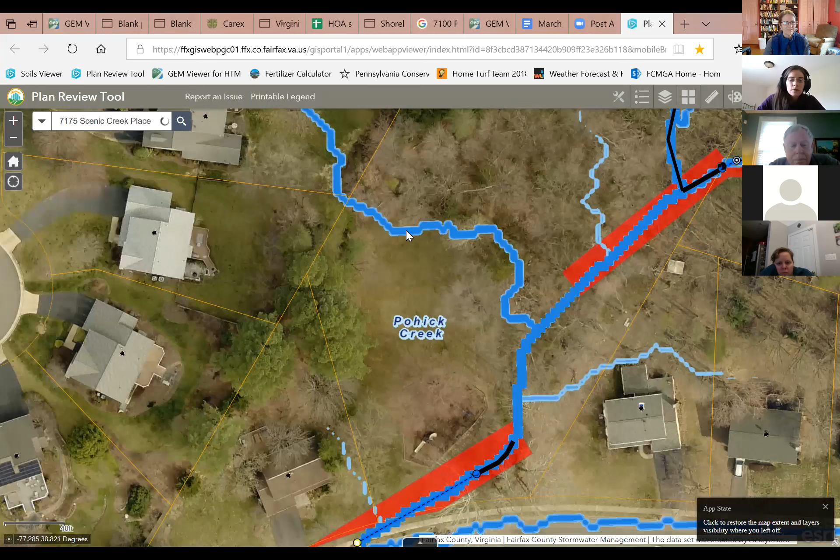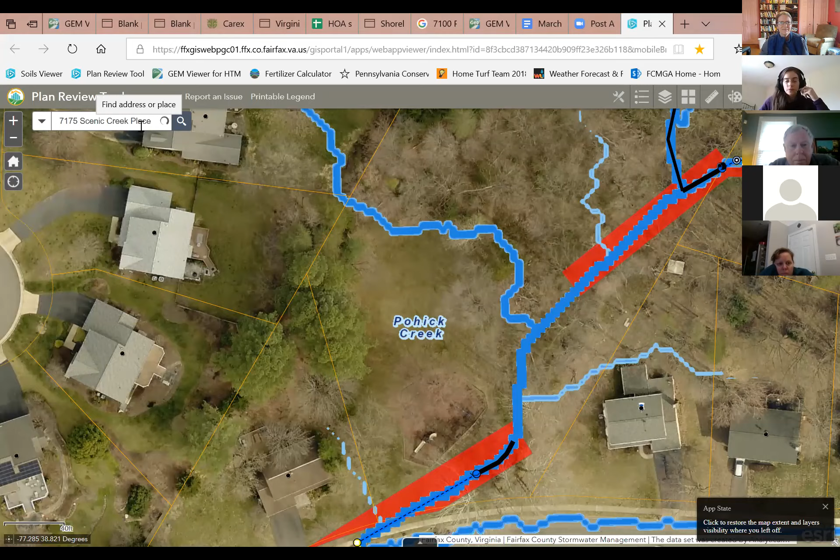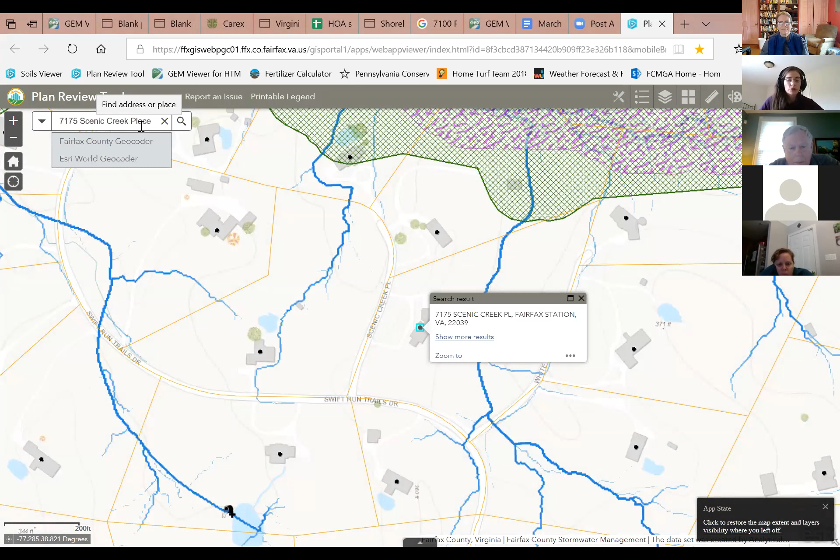Understanding those grass swales and how they look, they are a stormwater management feature, conveying runoff. One thing to understand is just how much runoff is conveyed through them. Well-maintained turf can take a lot of runoff and really prevent soil erosion, so it might be the appropriate type of ground cover for those areas.

So we can talk about other solutions. This was one. Are we on the map screen now? Yes, okay.

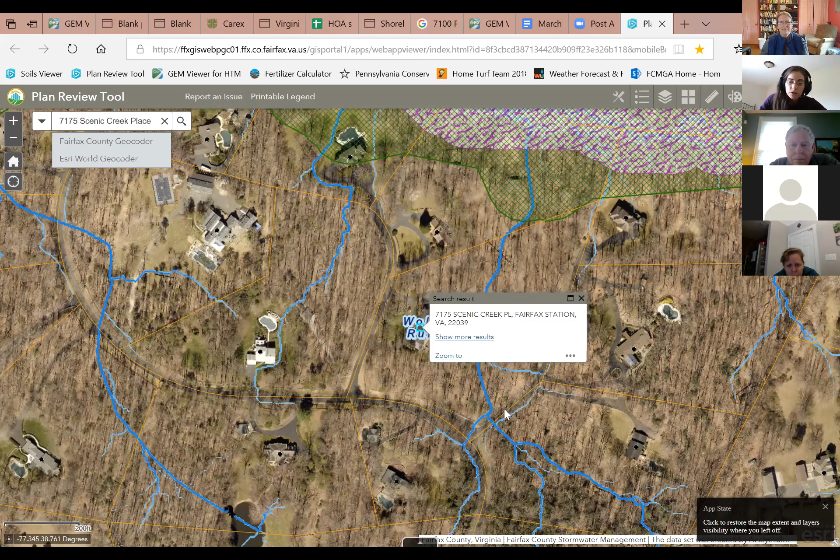So for context, very large parcels drain to the RPA stream system. It doesn't ever look like there's too much congregating, draining from the roadsides.

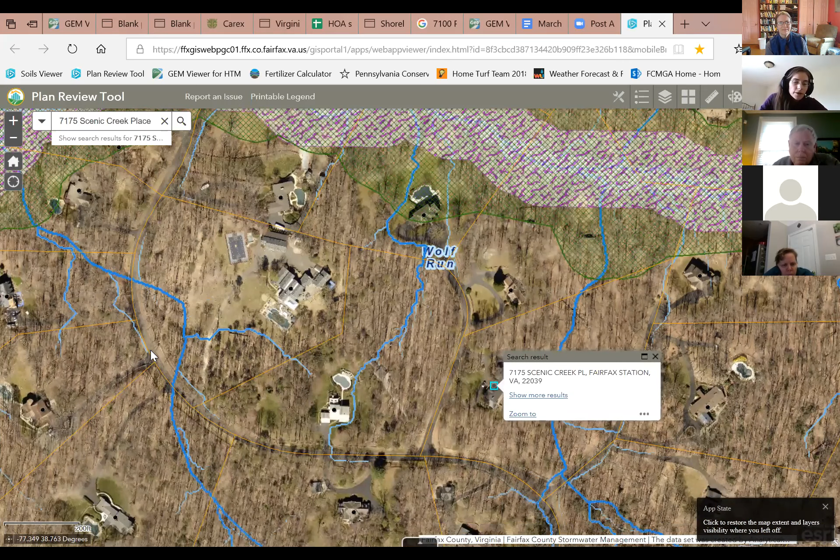So converting those, like I said, the concern would be taking them out of turf if the quantity of runoff is too great, that the turf might really be the best option. So you can give it a try with some other types of ground covers to stand up to the flows.

If turf isn't aesthetically pleasing, I'm not sure the community will like rock-lined channels. Sometimes using rock-lined channels like dry creek beds, surrounded by an edging of conservation landscaping, is how some people screen those stormwater solutions. So we're stabilizing the soil on the bottom with that rock line, and then including taller bunch grasses around the upper sloped edge just to screen that rock material.

Maybe aesthetically, it's hard for me to understand, and maybe you can follow up with some pictures of examples of other solutions you've seen that you think the community likes to enhance.